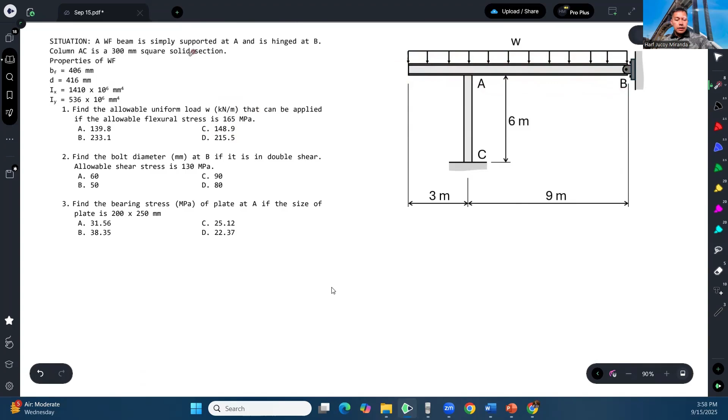We need to find this W, the allowable uniform load, given that the allowable flexural stress is 165 megapascal. To compute that, first we have to know the value of the maximum moment of this beam. Since the support is a simple support while this is a hinge, we can idealize the beam like this.

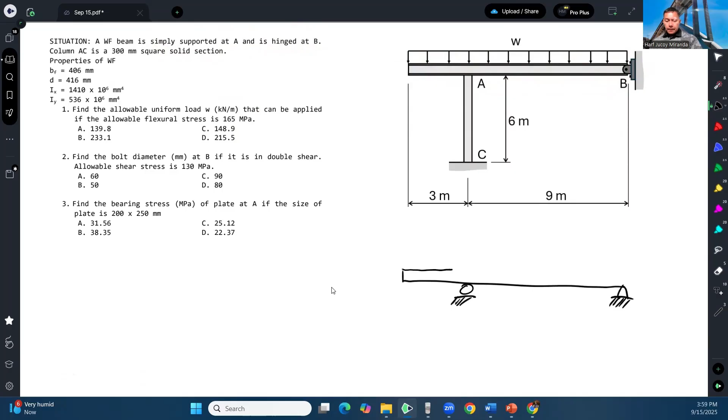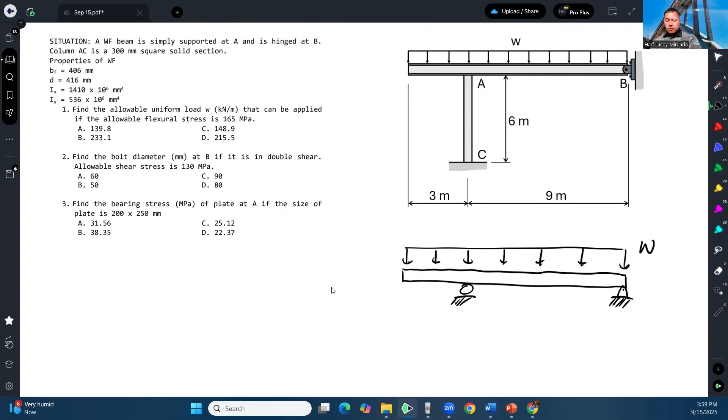We can simply idealize it like that, with the uniform load W applied. So first we need to know what the maximum moment that will be produced is.

Because the flexural stress formula is MC over I, we need to solve for M in terms of W. We have measurements here: this is 3 meters, this is 9 meters.

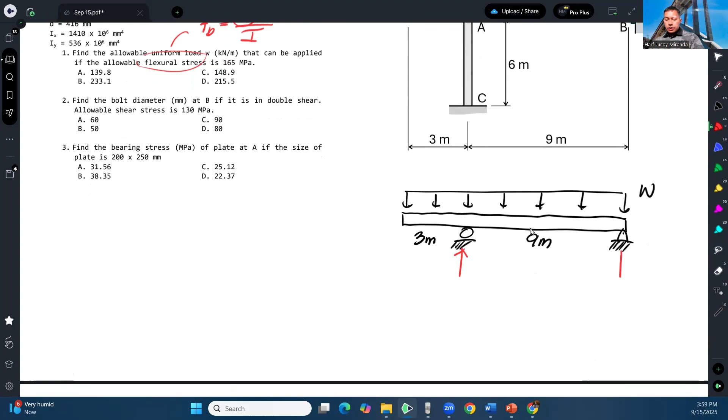To calculate the maximum moment, let's first solve for the reactions. Let's call this reaction at A and reaction at B. To solve for the reactions, we will apply summation of moments. I will do summation of moment at B first to solve for A.

Taking summation of moment at B equal to 0, assuming counterclockwise positive, we have W times the full length, which is 3 plus 9, so 12. The moment arm is half of 12. That is W times 12, and the moment arm is half of 12, and the rotation it produces is counterclockwise.

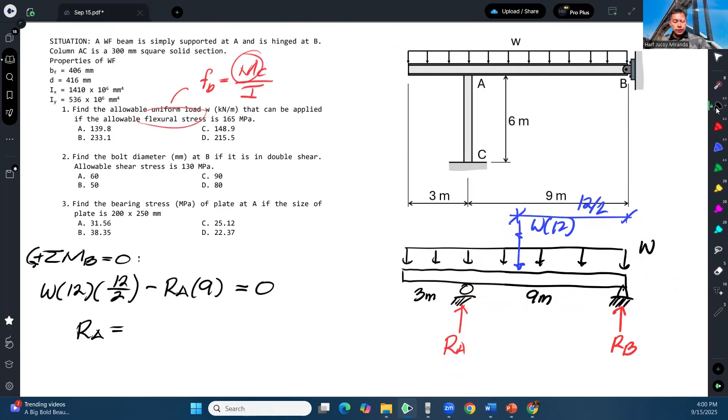Then we have the reaction at A, times 9, which is the moment arm from B, and the rotation is clockwise, so this is negative. Setting that all equal to 0, we can solve for RA in terms of W. We have 12 times 12 over 2, over 9, which gives us 8. So RA equals 8W.

Now to get the reaction at B, we take summation of forces in Y equal to 0, assuming upward positive. We have downward W times 12, upward RA, and upward RB. From here we can solve for the reaction at B, which gives us 4W, since 12 minus 8 is 4. So now we have the reactions in terms of W.

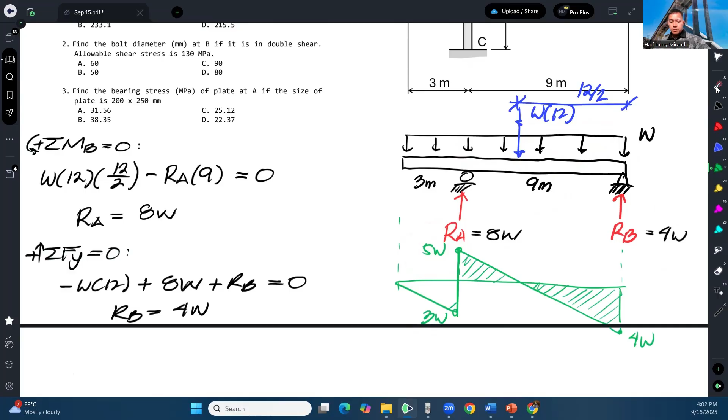Now to calculate the maximum moment, you need to identify where the point of zero shear is. Maximum moments can be found where there is a point of zero shear, or where a concentrated moment is applied on the beam. In this case, there's no concentrated moment applied on the beam, so we rely on finding the points of zero shear. To clarify: maximum moments are found where the points of zero shear are. A point of zero shear is where the shear diagram crosses zero.

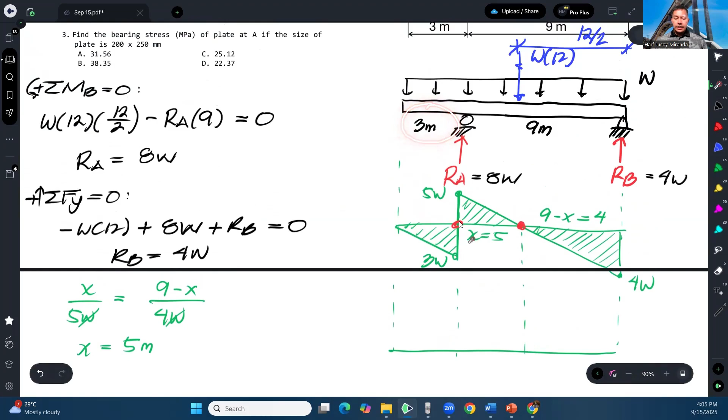Now we are ready to compute the moment. The area here will just be 1/2 base times height, base is 3, height is 3w, so 1/2 base times 3w, that would be 4.5w. But it's negative because the area is negative.

And the curvature goes like this. Next, we need to add this area: 1/2 base times height plus 1/2 base times height. By the way, this was supposed to be negative. So it comes out to 8w.

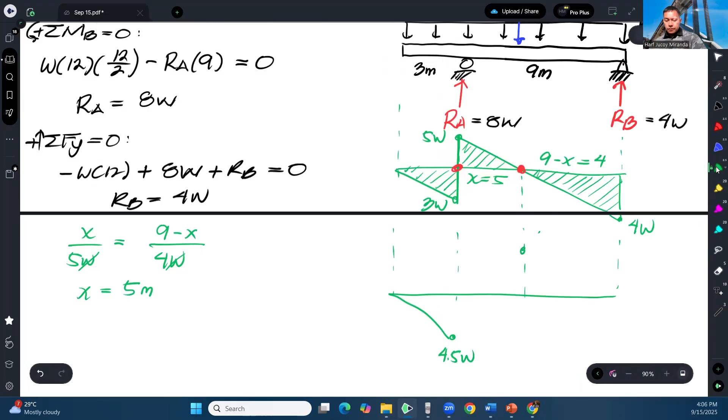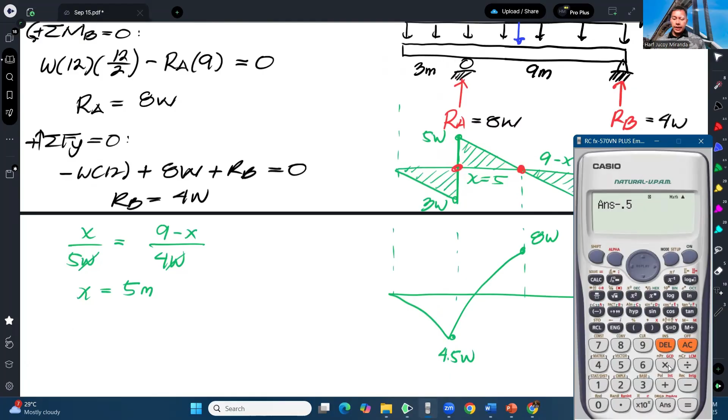So it goes like that. And then lastly, we will need to subtract this area: minus 1/2 base times height, and that gives us 0. So the moment diagram closes. So this is now our moment diagram.

As we can see here, we have two peak moments. Actually this is the maximum negative moment, and this is the maximum positive moment.

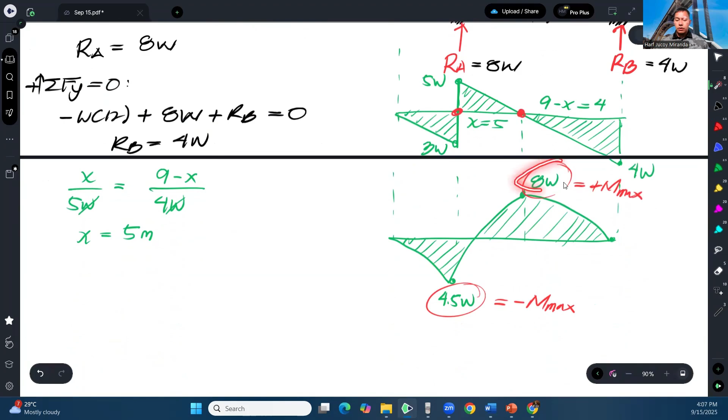But in this case, there's no specification of what kind of bending moment the allowable bending stress applies to, so we assume this is good for both positive and negative bending. That means we just pick one, the largest bending moment, which in this case is bigger, 8W versus only 4.5. We will use this in determining what W is needed.

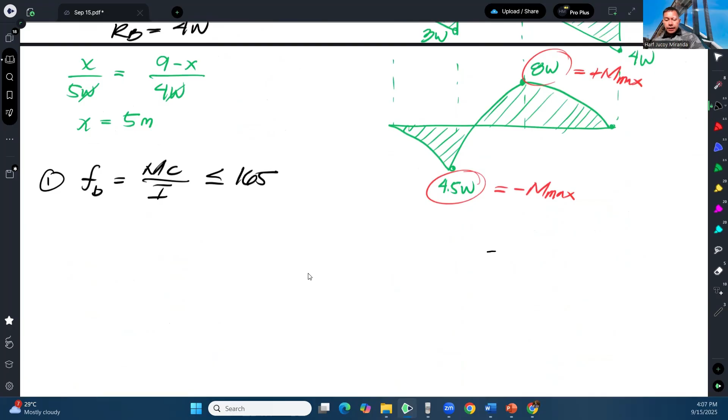Again incorporating this for number 1: the actual bending stress, equal to MC over I, should not exceed 165 megapascal. Now as for the section itself, the wide flange section looks like this.

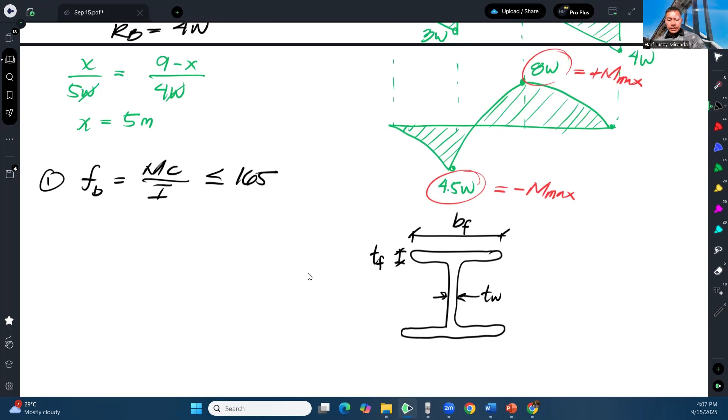This is called the flange width. This is called the flange thickness. This is called the web thickness. And lastly, this is the overall depth.

As for C, since the wide flange section is doubly symmetric, the neutral axis is at the center, so no need to solve. That means our C is either from neutral axis to this fiber or from neutral axis to that fiber, either of the two, which are equal, and that is equivalent to half of the depth.

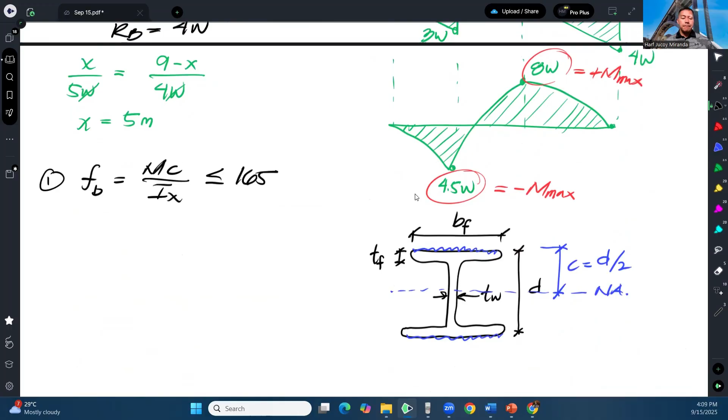So let's substitute. Our moment is 8W, and by the way this 8W is in kilonewton-meter, so I'll multiply by 1 million. Our C is, as mentioned, D over 2, and the given D is 416. And our I, Ix, is given as 1,410 times 10 to the 6. This should not exceed 165, and from here we get the W that is needed.

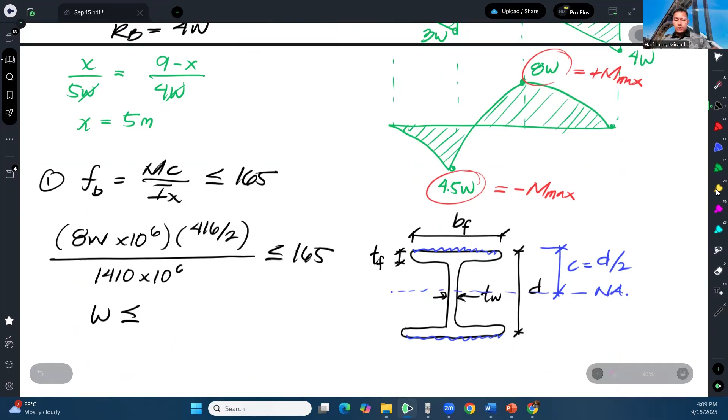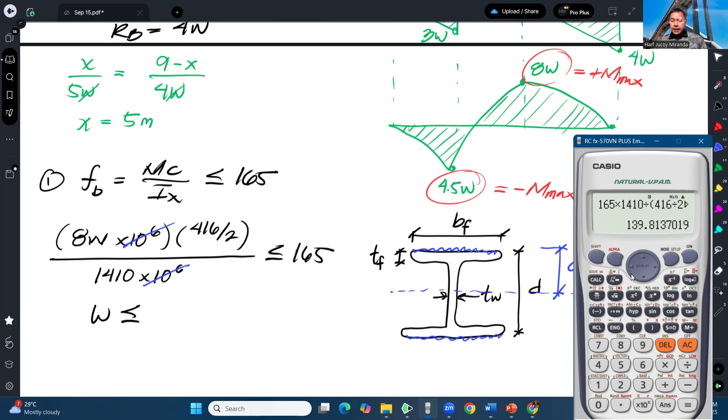So we are left with 165 times 1,410 over 416 over 2, times over 8. Okay, so that gives us 139.81 kilonewton per meter, and that would be our answer for number 1. Hindi pwedeng umabot or lumagpas ng 139 yung W, otherwise lalagpas na yung flexural stress ng 165.

Okay, next, find the bolt diameter at B if it is in double shear. So pinapahanap naman yung bolt diameter dito if it is in double shear. Wala siyang binigay na W dito, so here we will assume na kung ano yung na-solve natin na W dun sa number 1, yun na rin yung W na gagamitin natin to answer number 2, maliban na lang kung may sinabi siyang ibang uniform weight na gagamitin.

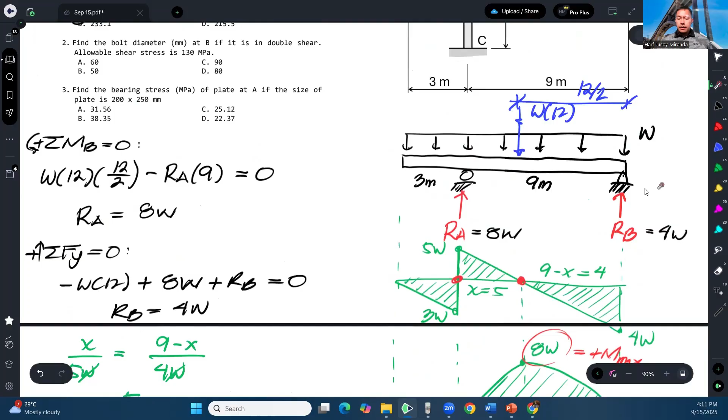So dahil hinahanap yung bolt diameter dito, tapos naka-double shear daw yan, kailangan nating makuha yung reaction dito sa B. Yung reaction sa B yung kailangan natin. So actually yung reaction sa B, ito yun, 4W. Dahil alam na naman natin kung ano yung W, so we can solve for that. So number 2, the reaction at B can now be calculated, and that is 4W.

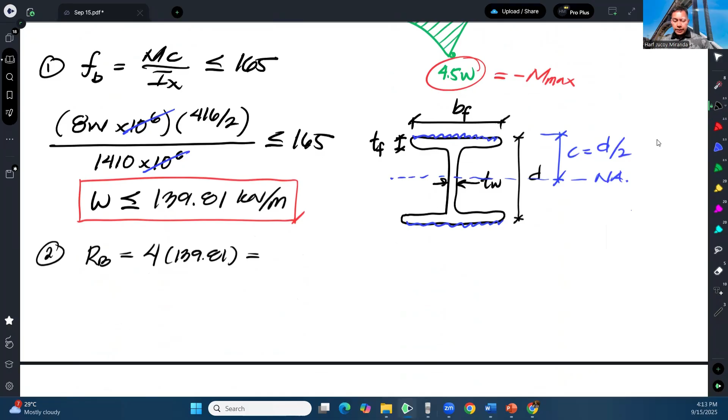And that is times 4, 559.25 kilonewtons. Okay, so ano sabi? Ito daw ay naka-double shear.

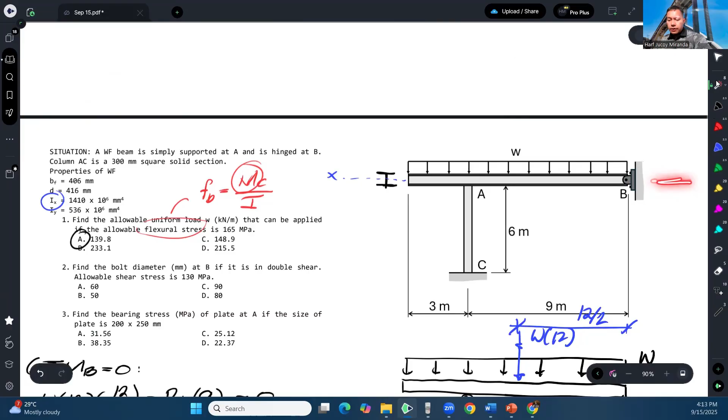So ang itsura pala niyan, parang kung titingnan natin sa view na to, dito tayo nakatingin. Tingnan natin siya dito sa view na to. Okay, so makikita natin ganito, yung wide flange. Tapos andito yung support. Tsaka to, isa pa, nandyan yung support. Bali, nandito yung bolt. Yan yung bolt. Okay, so yan yung sa B.

Okay, so meron kang reaction, RB, di ba? So syempre magre-resist itong ano na 'to. Ito bali yung ano natin eh, ito bali yung hinge support sa B.

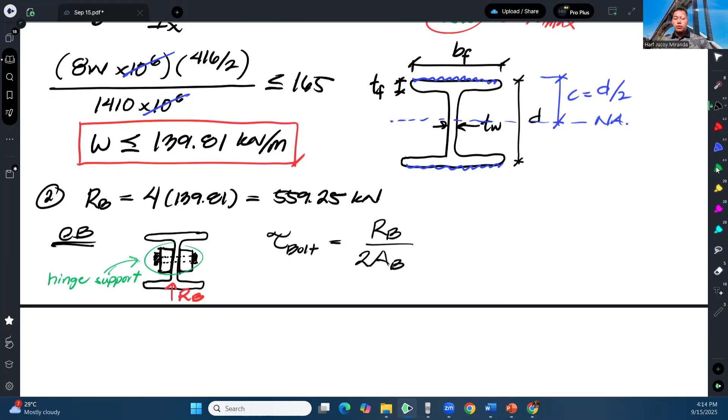So, as we all know, yung shear stress ng bolt would be equal to the force, in this case RB, over area ng bolt. But because this is in double shear, yung area ng bolt na gagamitin is times 2. And this should not exceed the allowable na 130. So plugging in the values, that is 559.25, gawin lang natin tong Newton over 2 times pi over 4 times the diameter of the bolt squared, that should not exceed 130.

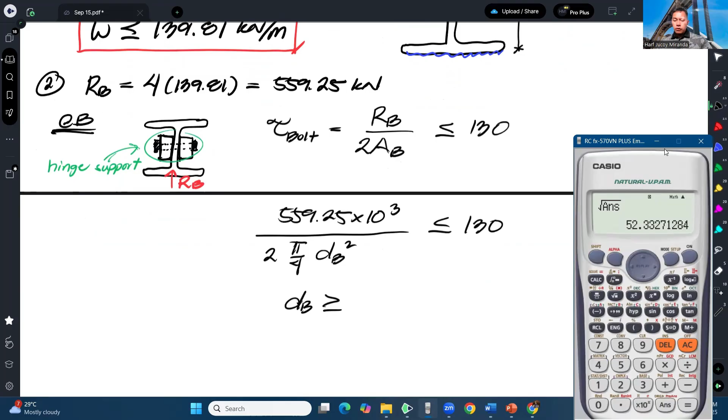So therefore, the diameter of the bolt should be at least 52.33. Okay, and from the choices, we will choose the next higher value of that, and that is 60 millimeters. So round this up to 60 mm.

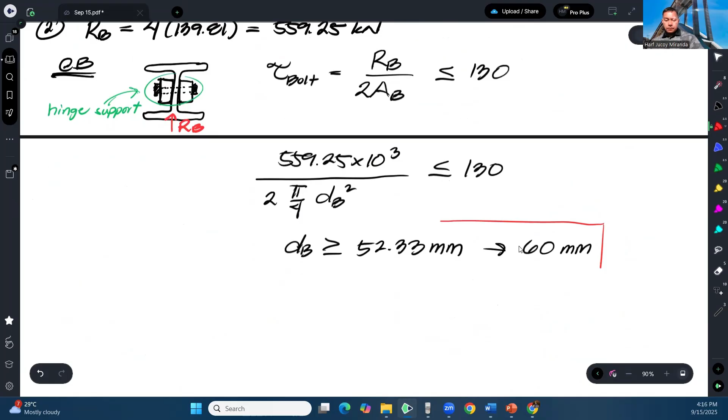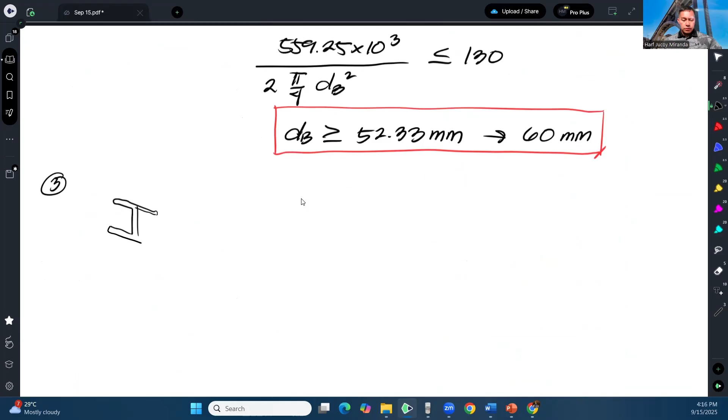Lastly, for number 3, find the bearing stress of plate at A if the size of the plate is 200 by 250. So dito naman guys, ano daw yung bearing stress dyan? Di ba sinabi niya kanina, ito daw ay solid square section, ibig sabihin etong beam nakapatong dito. Nakapatong siya, bali parang itsura lang. Parang kung ito yung wide flange, yan yung wide flange, so nakapatong siya dun sa... ano ba to? 300 to eh.

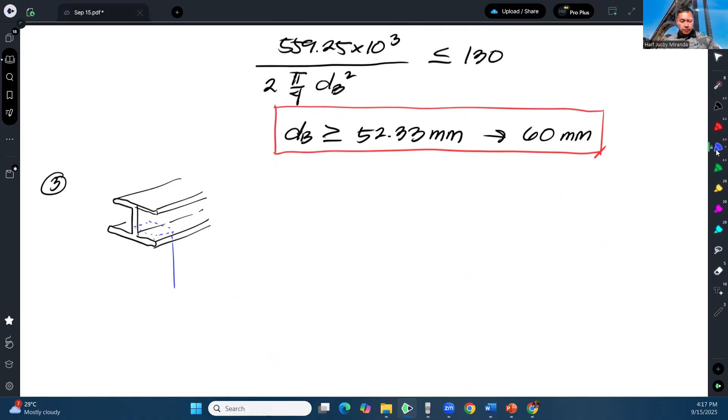So 300 millimeters square, parang ito siya sa ilalim, parang ganyan yan. Okay, so nakapatong, and then meron ditong base plate. Ano yung plate? Ito, plate is 200 by 250. So bali ito yung sa A. Okay, so ang tanong, ano daw yung bearing stress?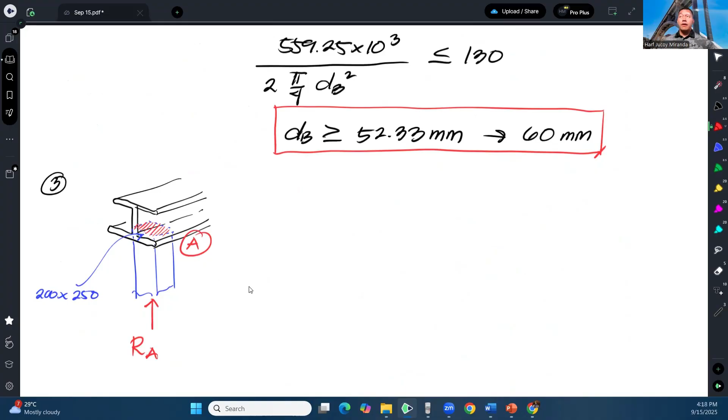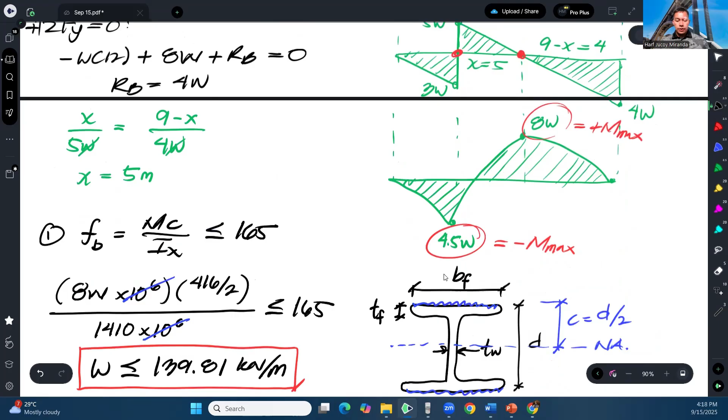Well, napakasimple lang ng question kasi kailangan mo lang kunin dyan, ano yung reaction sa A? Tapos yung reaction sa A na yun will be distributed over this area. Parang force over area lang yung tinatanong. So therefore, yung reaction sa A, we already know that that is actually 8W, which is equal to, going back, ito yung W no?

Times 8, 1,118.51 kilonewtons. So therefore, yung bearing stress dyan is equal to force, in this case yung reaction sa A, over yung area ng bearing. Which is, ilan yun? Baka isipin niyo area ng bolt, ano? Contact area na lang. And that is 1,118.51, gawin nating Newton over area. So ang area natin is 200 by 250. And that gives us the bearing stress at A.

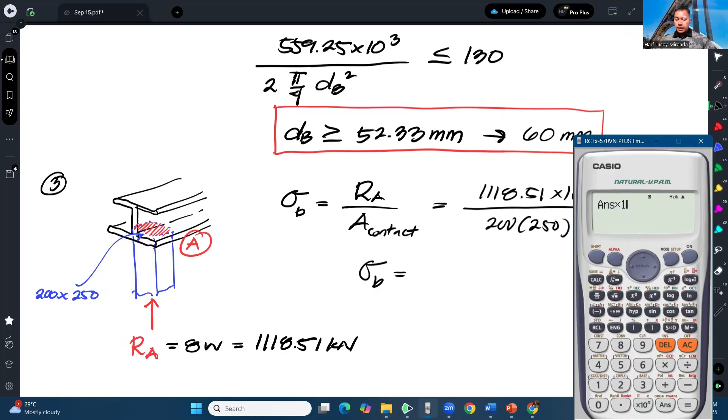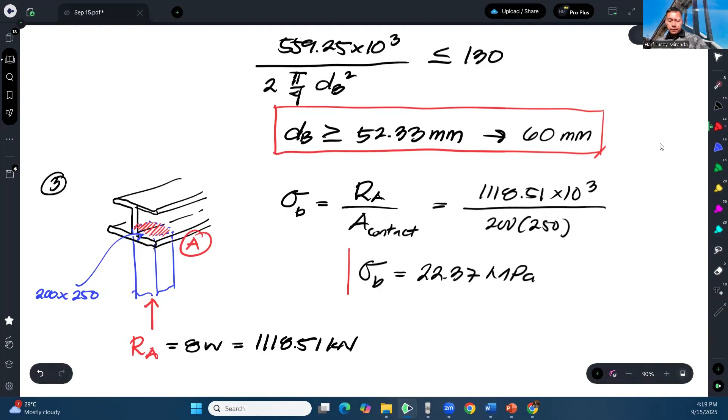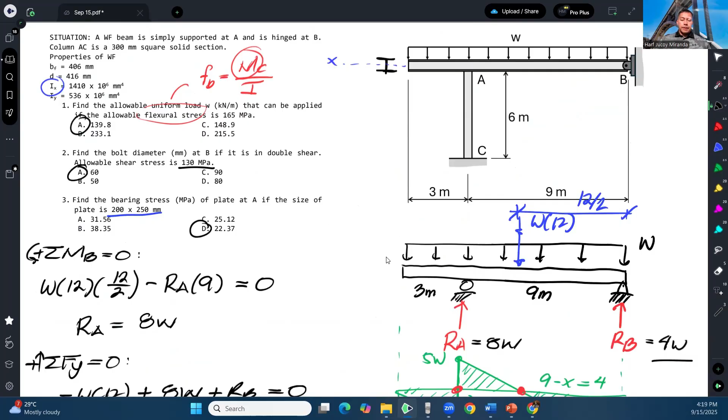Okay, and that gives us times 1,000 pa pala, nalimutan ba? That gives us 22.37 megapascals, and that will be our answer for number 3. So 22.37, and that's how we solve this problem.